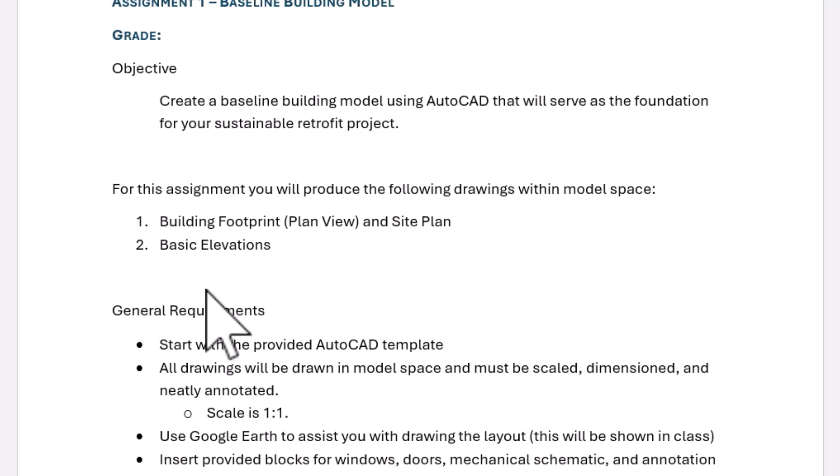General requirements: start with the provided AutoCAD template. All drawings will be drawn in model space and must be scaled, dimensioned, and neatly annotated. Scale is 1:1, so in model space just make sure you keep it 1:1.

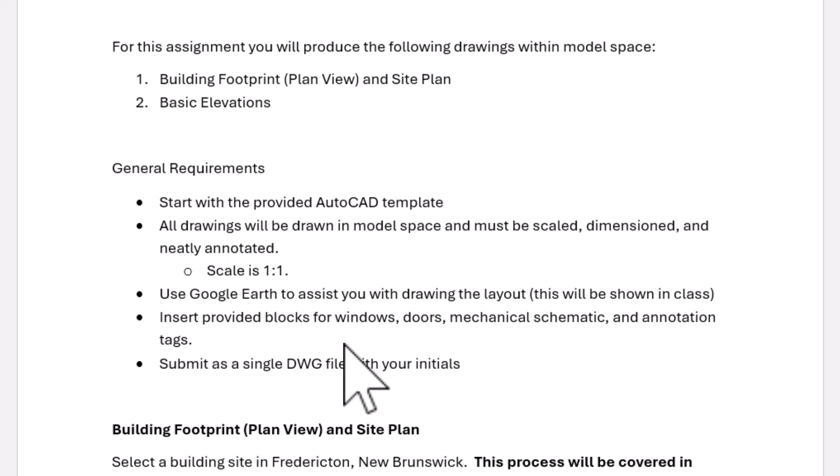For the building footprint plan view, select a building in Fredericton, New Brunswick. Again, this process will be covered in class.

Look for one-floor smaller buildings that are less than 8,000 square feet. Most students found success with kind of a 3,000 to 4,000 square foot building. It doesn't matter the size, doesn't matter really the location, but we are looking at somewhere in Fredericton.

Draw the footprint, so you're going to create the footprint of the building using color blue. That just means tracing around the outside of the building, once I show you how to load that up into Google Earth.

And then you're going to set the wall size as 2 feet. We don't really know what the wall size of each building is going to be, so just offsetting by 2 feet gives you a pretty good indication of what a normal commercial building is, and that's what we use when we do the footprint. Dimensions.

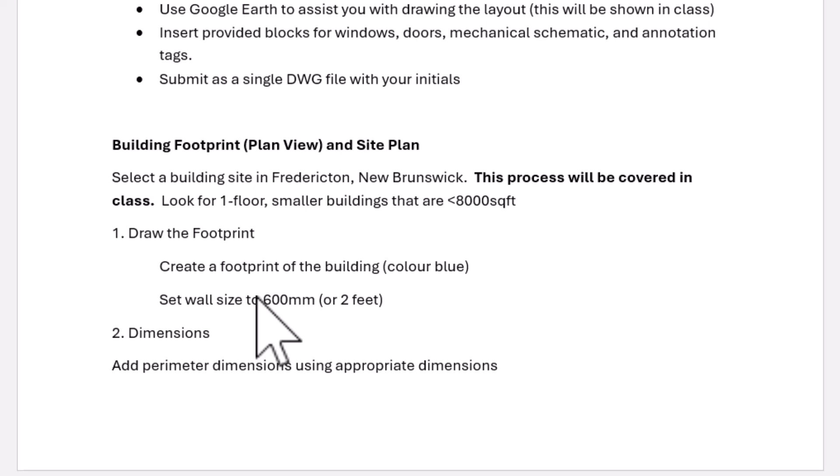Add perimeter dimensions using appropriate dimensions. This basically means that you're just going to use the length and the width for the dimensions of the building. Appropriate meaning keep it in feet and inches, or you can do metric and millimeters. Those would be the two that I would like to see.

Clearly label overall length and width of the building, so again that's for the perimeter. Provide the total area of the plot, so when you finish your actual plot of the building, meaning the whole footprint including the building itself, you'll have the square footage of that building.

Label roadways and streets around the building. This is important to help me understand where this is located. So any major streets - for example, if you're on Prospect Street or Main Street on the north side, you can just label that. But any side streets, it's helpful for me to know where this building is located.

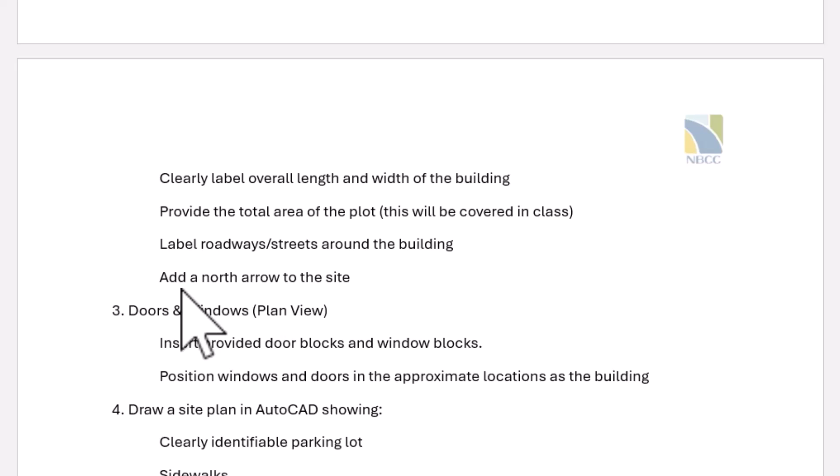And then add a north arrow to the site, so somewhere in the model space just make sure that there's a north arrow indicating which direction is which.

Doors and windows on the plan view: insert provided door blocks and window blocks. Position windows and doors in the approximate locations as the building. Laying these out is trickier than it may appear, but I'll show you some tricks on how you can put these in.

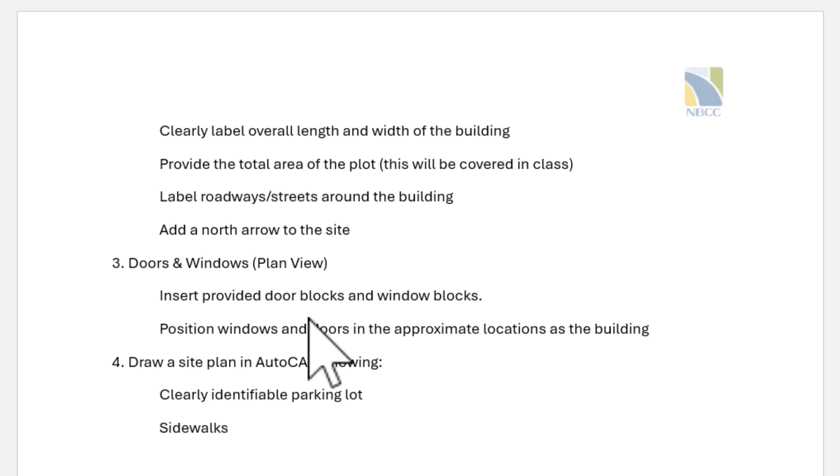Draw a site plan in AutoCAD showing clearly identifiable parking lot and sidewalks. So just making sure that when you have your building, you're also showing basically infrastructure around that site as well.

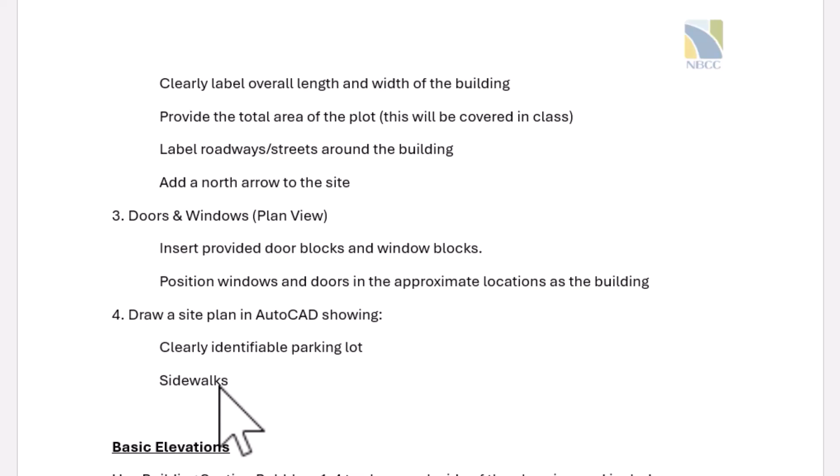For the elevations, use building section bubbles 1 to 4 to show each side of the plan view and include height and width of each side of the building.

All right, so make sure you do the dimensions - window locations and sizes, so wherever you have a window, just make sure that the sizes are shown. Door locations as well - typically doors for commercial are going to be 36 inches or 3 feet.

So I think it's about 900 millimeters if you're doing metric. That's kind of a standard size for commercial. Making sure that the roof line is shown.

If you cannot actually physically see what the roof line is, make sure you just ask. But most buildings, if there's a flat roof, probably have a parapet of some kind, but usually you can see that now with Google Earth. You can zoom right in.

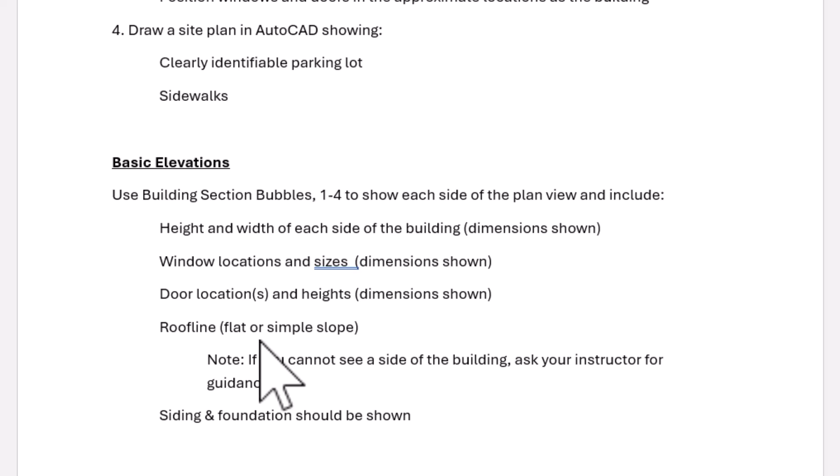Making sure that you draw the siding. So if it has brick, or vinyl, or steel cladding, just making sure that siding is shown.

The next video I'll show will be opening up and showing you how to get started.

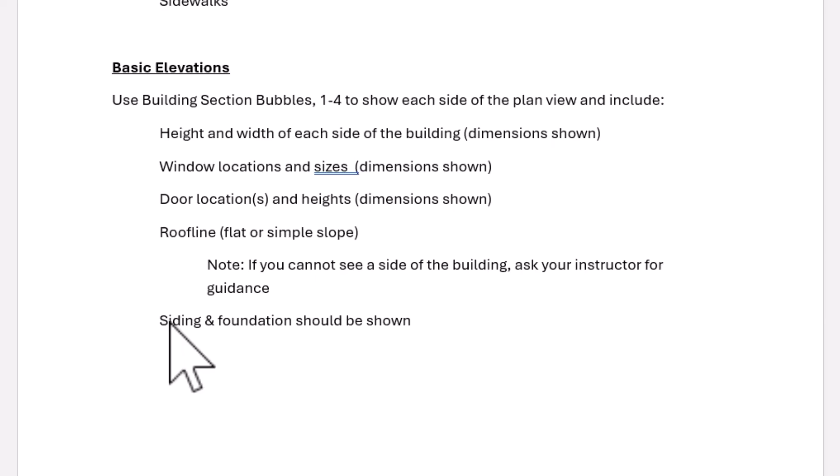Okay, so let's take a look at assignment 1 and how to put it together. On Brightspace, my suggestion is on the left-hand side you go into templates and download SBC-1-template, the CAD file. You can download that. I'm just going to point out a couple things that I pointed out in the instructions.

Underneath here, there's some blocks you can download. Those have windows and doors that you can get.

This is another file that myself, Dominique, and Scott have put together over the years. It's a great file. It basically shows a lot of the stuff you guys want to do for starting up a drawing—things like layers, line types, text heights, that sort of stuff. So by starting with SBC-1, you have a lot of the stuff, but it may not be complete. Reviewing this file, going through and making sure you have everything set up that you want. You probably have this done in Senior Project, but if you don't, this is a good place to start.

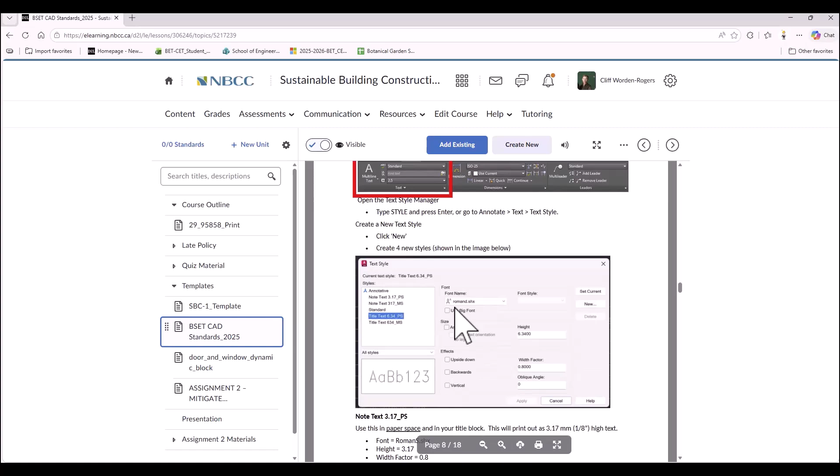When you download the file, it's going to start something like this, and it's going to say open up the external reference palette or ignore the unresolved reference files. This is looking for something for the title block, likely an image of NBCC. If you need help making the final title block have an image in it, I can help. For right now, though, we're just going to hit ignore.

So ignore that. What we're going to start with today is getting a map open here where we can go into Fredericton and select a building site. Let's start by doing that.

Underneath the insert option, there's a little world icon over here called set location. If this is turned off, you can come up here and type in the keyword location, or Google how to turn that on. We're going to go from map—so we're going to select this.

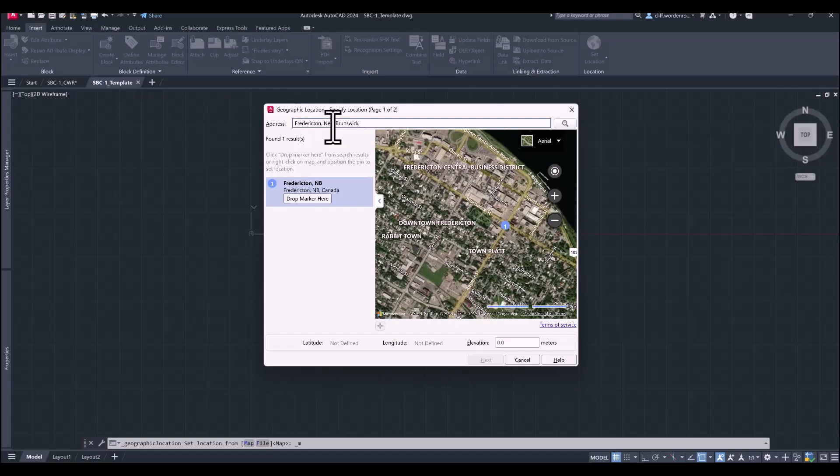Now we have the ability to basically look through the world where we want to go. So we're going to type in Fredericton, New Brunswick. Hit OK, and now we have our city pulled up. I'm going to drop the marker here, so it's going to show where I am. I'm going to hit next.

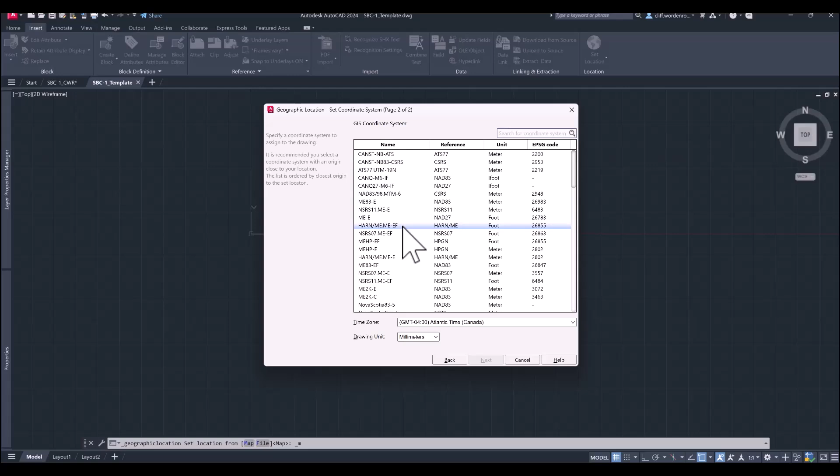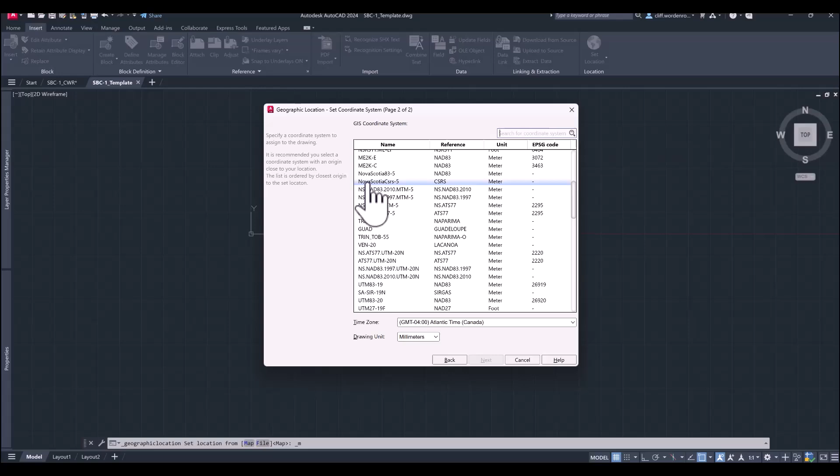Now this next piece should talk about how the GIS coordinate system works. I don't have a great answer for this other than—there's so many here. This probably matters when you're doing surveying. For what we're doing, we don't really need to get that specific. I usually have used the Nova Scotia ones—these are NS ones. Any of these will work. For the sake of purposes here, I am going to use this one. I'm going to hit next.

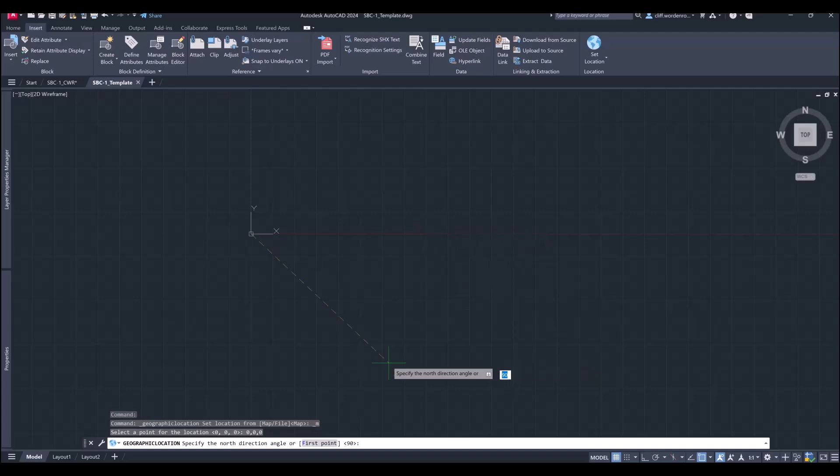It says select the point of location where you want to start. I'm just going to go 0, 0, 0. Hit enter. It says specify the north direction angle—you do want it at 90. You'll see here it's trying to select this, I just hit enter. So 90 would be straight up, and we should see the map populate.

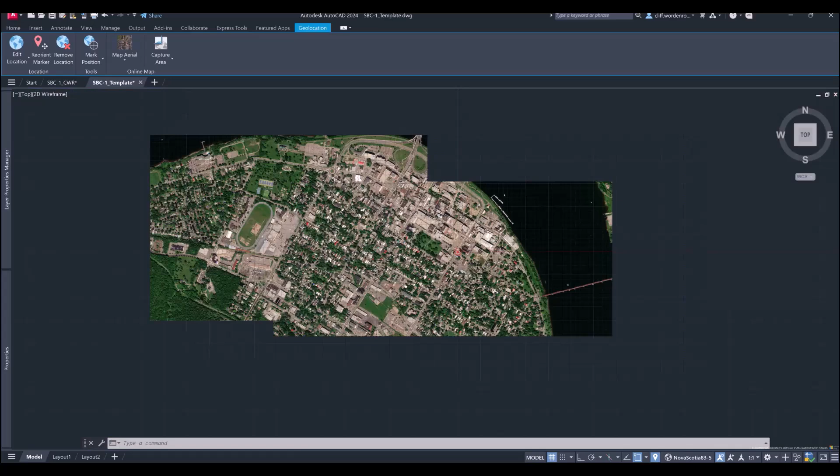Now we have Fredericton—now we have our location picked out. And now you can really figure out what site you want.

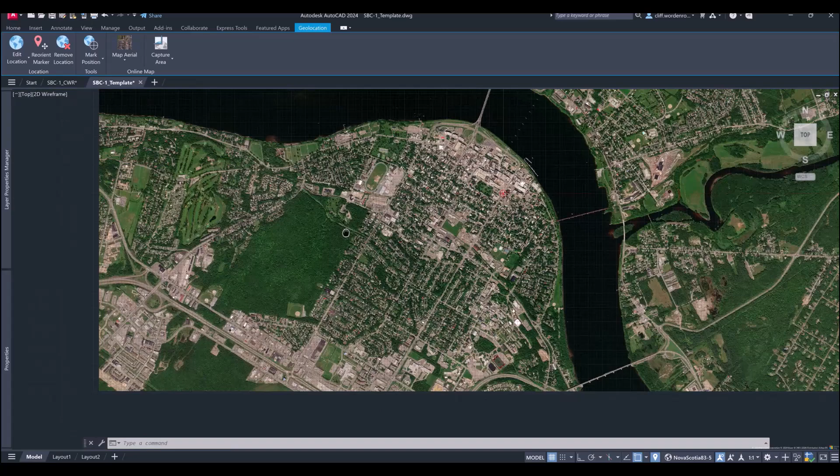You can do it here in AutoCAD, but my suggestion is to go to Google Maps and figure out where you want to go. The site that I chose for this building is up on Prospect Street as the example, which is the Second Cup. So Second Cup is this site here. I'm going to open that and show you kind of what the finished drawing is.

I'm going to show you how to do that here in a second. But I just want to talk about—there is no right building here. I just want you to select any building.

It can be along Prospect Street, on the north side.

What I hope is that by going through this course, you learn by drawing and going through these different buildings, or your own building, that there's things you can change about it and things that are good about it. So there isn't a right or wrong answer.

The reason I chose Second Cup was that I just felt, as a small business being near Tim Hortons and Milltown and a bunch of other coffee shops, I kind of felt for Second Cup. It's kind of a small little business, and I was wondering what they could do in terms of making their business better.

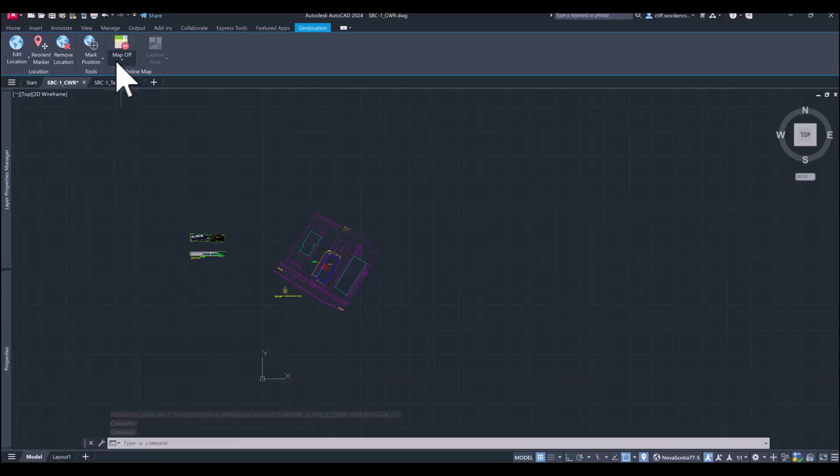All right, so I'm just going to flick over to my building now. So mine is this one, right? This kind of shows what the finished product looks like. I'm going to turn the map on for a second and show what it looks like over top. So I've drawn over top of this, and I just want to show you again how you approach drawing your site, and then I'll go through the text and all that stuff.

So if we go back to the assignment instructions, some of the things I want you to do is draw the footprint of the building, which is the outline. You'll see this blue line, and there's kind of an offset here around the outside that's 600 millimeters from that. So I traced the outside of the building, then offset this one to go around the outside.

I think this other line here is the roof plan. So the roof actually extends over top of the walls itself, so that's what I'm showing there.

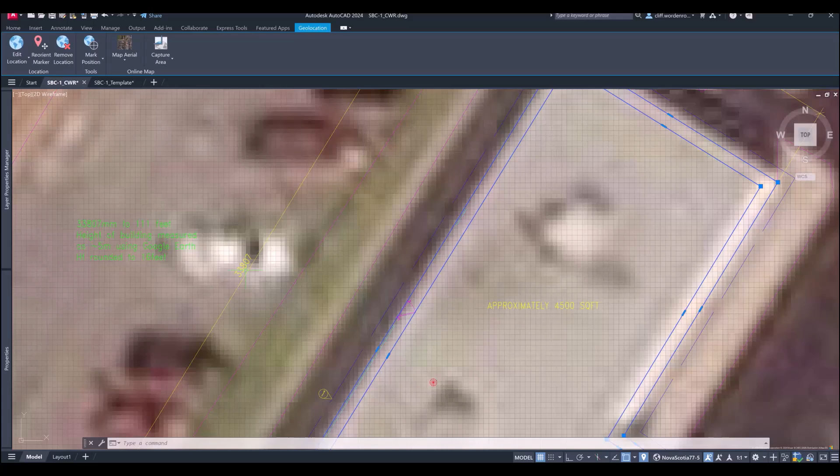All right, the next thing I'm showing is the dimensions. So the drawing that I have is metric, so these dimensions are in millimeters, but you can also do yours in feet. I actually kind of do both. So I've got metric - actually, let me just check this.

So these are international units, yeah, these are millimeters. So I do have millimeter dimensions, but I also do the physical dimensions in feet. You can do square millimeters, square meters, square feet - I just find it's easier for me to think in feet, so that's why I have it. All right, so I have the dimensions, and that's the exterior of the building, so I have those two.

Here again, I've just said the roof awning surrounds the building, that's why I have this little external dimension. You also need the total area of your building.

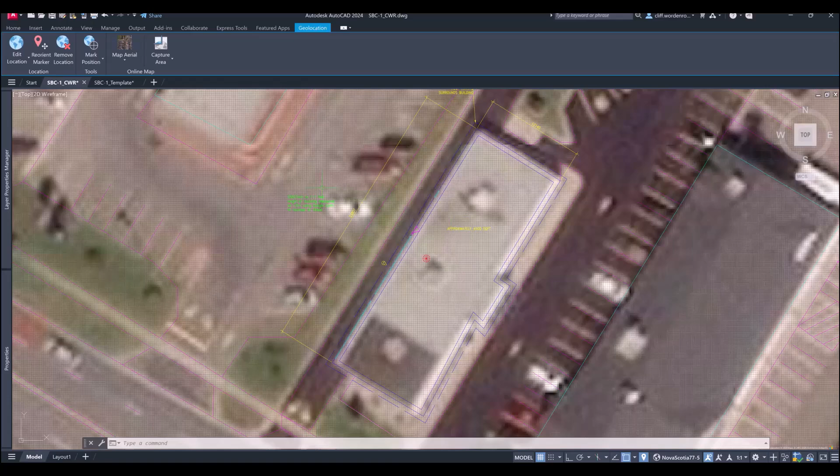Getting the total area of the building, I'm just going to scroll up here and show you how to do that. If you come over here under the Home tab, underneath the Measure, you can grab your area and area. So you're just going to snap this and get your general interior space.

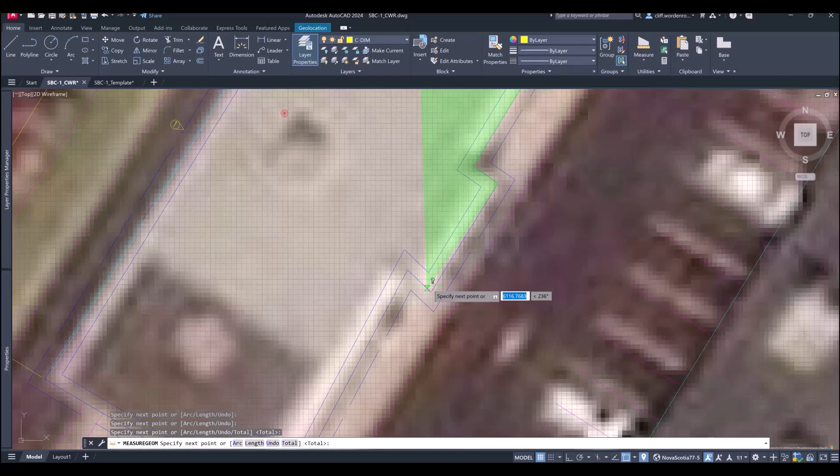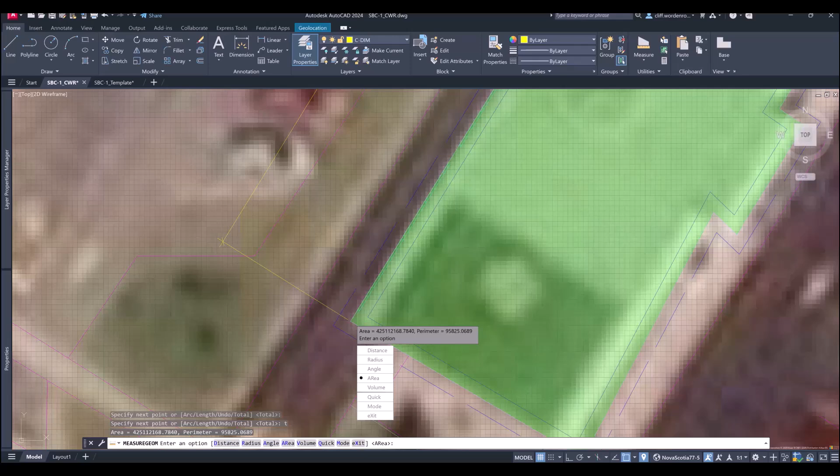So it's not the roof line I want, it's the interior of the building itself that I want, right? And then once you get this all done, I'm going to hit total. You'll see down here it says area, right? So mine is a massive number because it's in millimeters.

What I do is I take that dimension and then switch it to square feet. Again, you can just Google millimeters squared to feet squared, and then I write on top the approximate square footage of the building.

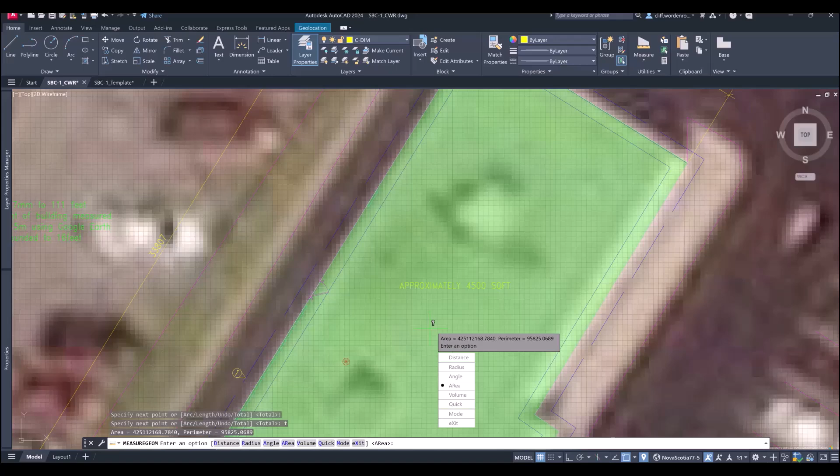Label roadways, streets around the building. So once you have this all traced out, you trace around the outside of the building, again, your parking lot.

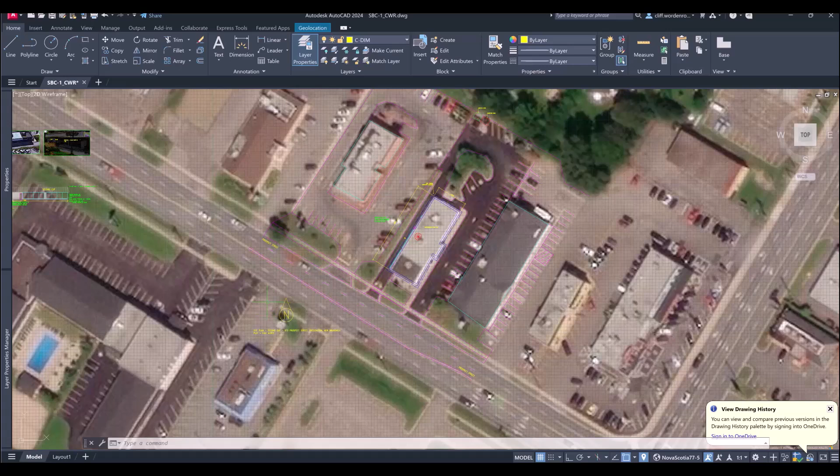Okay, I'm zoomed out here. You can see I've labeled the streets, Prospect Street. If it's a really long street, I label it on both sides. If there's an intersection, I label the intersection so I know where it is. The last thing on the instructions is adding a north arrow, which I've labeled down here on the south end.

So if I go into geolocation, I'm going to turn the map off. All right, so it's there. You can kind of see what I'm looking for in terms of the site.

One of the big things I'm looking for, guys, when you're drawing your building, is anything that's going to impact your site. Impact means factors like wind and sun. If the sun is coming around the building, it's going to be on the south side like this. Is there anything around your building that would potentially be impacted by the sunlight or the wind?

What we'll learn is the wind generally comes from this direction, coming out of the west going east. This building over here has some impact there, and I'm drawing this too just to show that this might have some impact there. So really get a full site, not just your building and the parking lot beside it.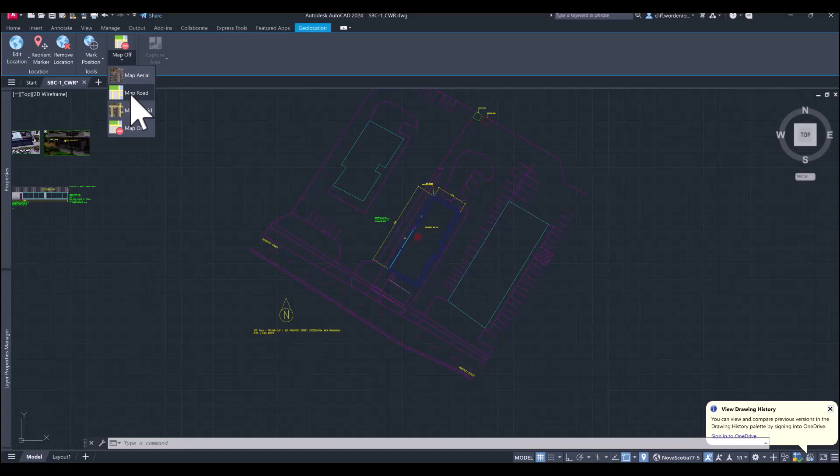With Prospect Street, there's really nothing on the other side that's going to impact my site. These are all low-lying buildings. There's no big trees or anything over here that I have to worry about.

But if I was drawing, say, this house, all the trees here would have some impact on this house. Obviously we're not drawing houses, we're drawing commercial buildings, but I just want to show that as an example.

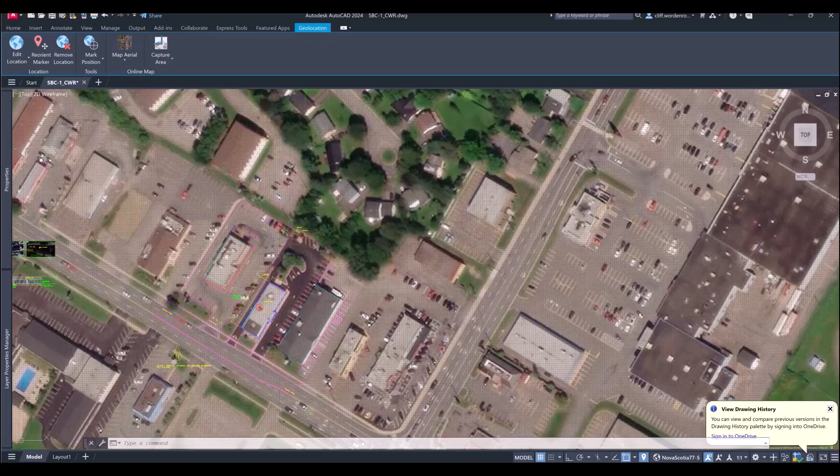Right, after that, gang, let me turn this off. The next is doors and windows. So in plan view, I've done a side view of the building. In my example, I've just done the one elevation, but what I'm asking for you is to do north, south, east, west of that.

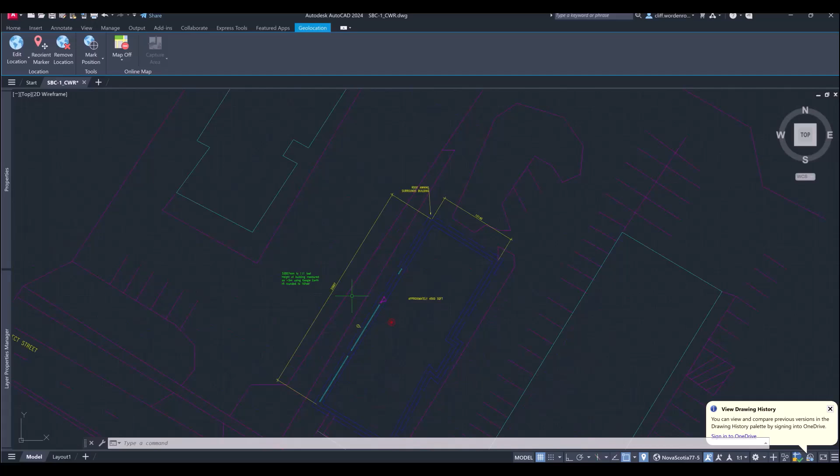Here you'll see I've labeled the west side of the building, and this is viewpoint 1. So if I come back to my building, here's number 1 — this is the west side of the building, and so I'm showing that.

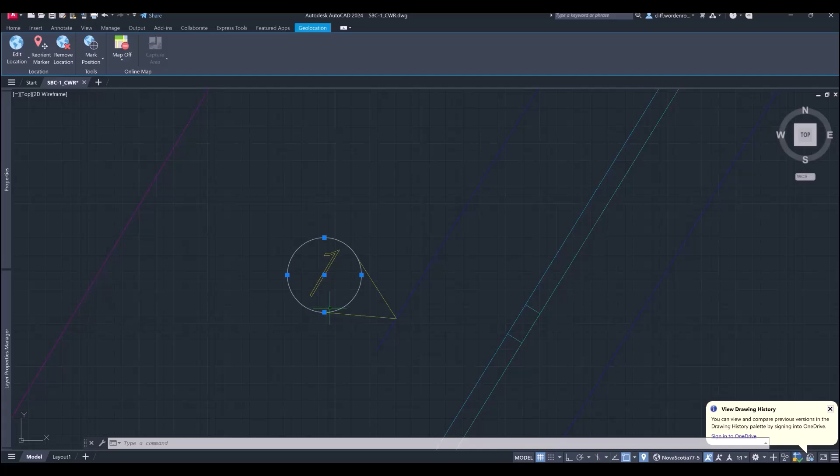In AutoCAD, the way we show that is we draw a bubble, and then just make a little triangle on the outside, which you can trim if you want. I started with a circle, added a text bubble with number 1 inside, and drew a little arrow. You can draw an arrow too, but these section bubbles are quite common, and you just put that on the outside of your building.

On the plan elevation, I've added where the windows exist. Again, these are blocks you can get on Brightspace as a template. So wherever there's windows on your building all the way around, you're going to put them in. I've just shown it as an example on the west side, adding doors and windows where they need to go.

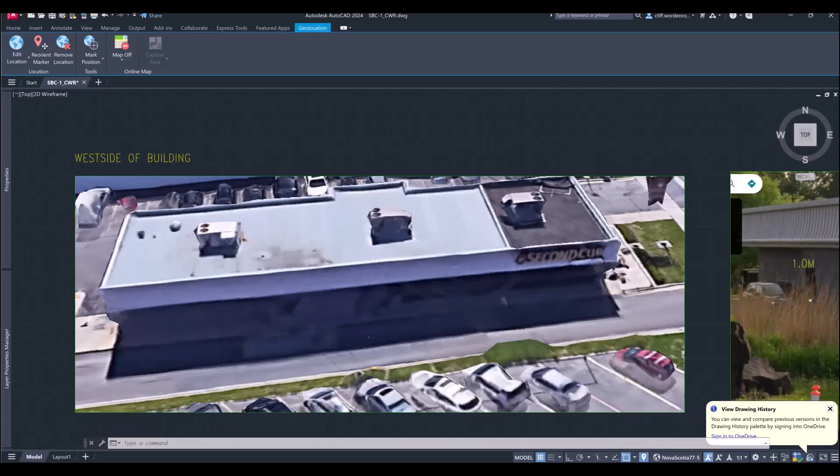The window sizing — the way we're going to do that is you can go into Google Earth and look at the physical site. So I've snipped some images to show how long things are.

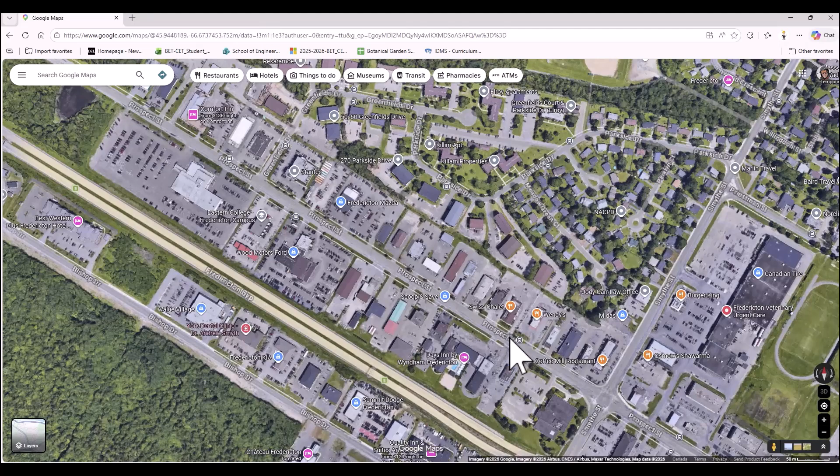So the way we can do that is if you go into maps, and go to your site — so here's Second Cup. I can drop my Google guy down, and here I can visually see how far everything is.

Now in this view, if I right click my mouse, I can't measure anything from this. So I'll show you in a second how to go to Google Earth, where you can actually measure things.

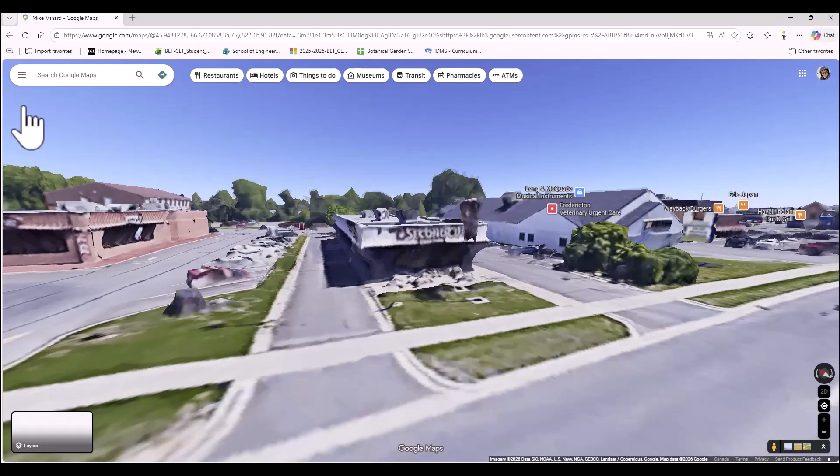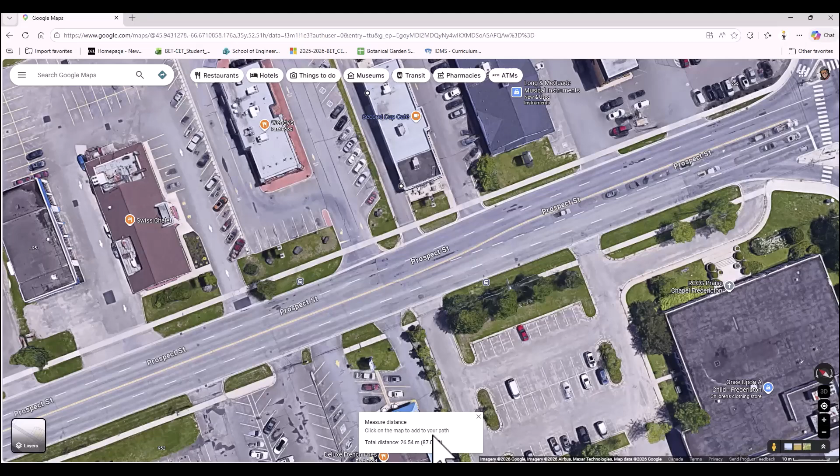But you can measure on the top view if you want. Here I have a little circle, so I can drag that and get dimensions of my site. You see here, total distance 26.54 meters or 87 feet — that's how I can get measures from the top. If you need Google Earth, just Google it and put in Google Earth.

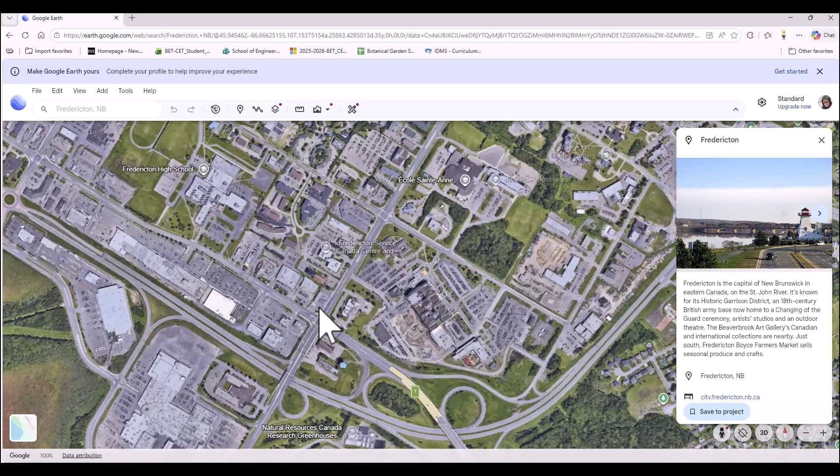Come up here. So these are approximations, gang. They don't have to be exact. So I'm not looking for... they should be roughly, I would say, right. But what I'm getting at is we're using technology to help us estimate. If we were physically on the site, I'd expect you could do this with a tape measure. We just don't have that here.

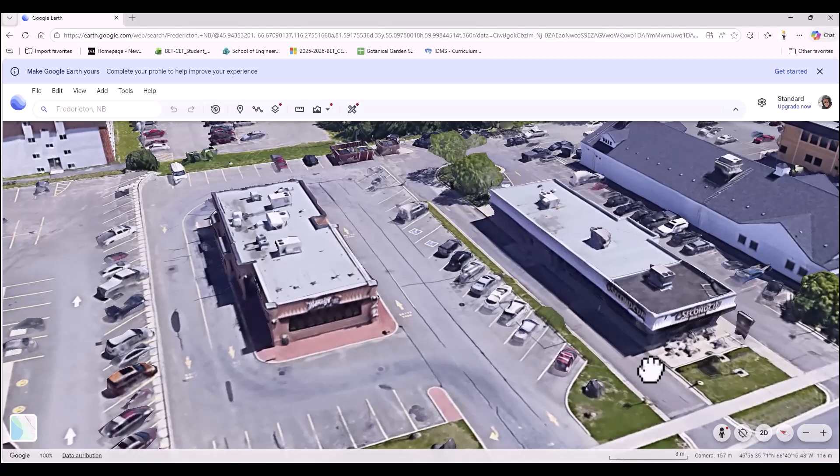So let me get out of here. If we go into 3D mode, this is the building I'm looking for, right? What we can do here is get into measuring points, and it will do, for example, I can take distances here. So I can estimate how far they are using Google Earth, get those dimensions, and translate that to window sizes and how long they are.

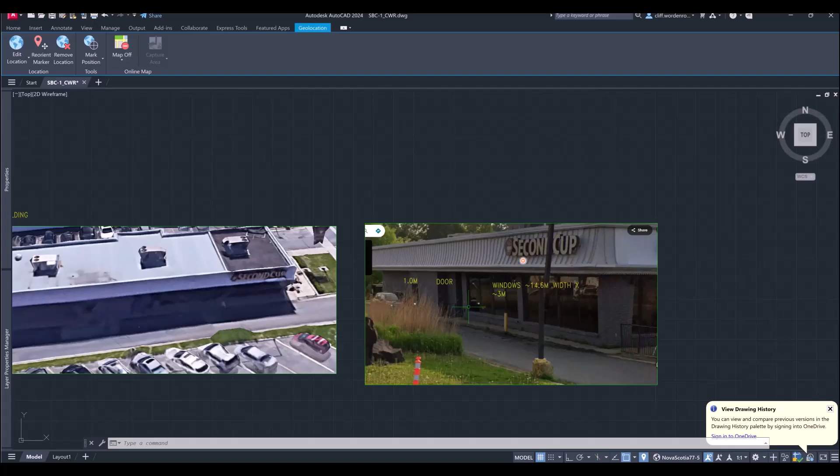So what I did here is I just measured out this window bank. There's a little gap of the building here, which I'll show in AutoCAD. Just use your best estimation. If you have a couple of these, you could put glazing the whole way along. Really what I'm looking for is that you've gone and looked at the building, you've appropriately tried to put in the dimensions that are there as best you can. And here you'll see I put kind of approximate distances.

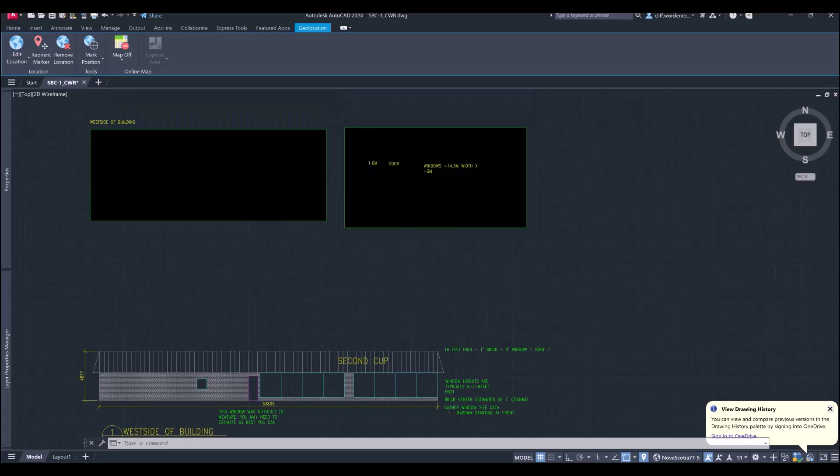So that's what I'm asking for, both on the top view and on the basic elevations, okay? And yeah, you'll put doors all the way around and any windows that are there. My suggestion is go on Google Earth, and if you want, you can snip images here. You can rotate around the building. Sometimes it can be hard to see what's in the back of the building.

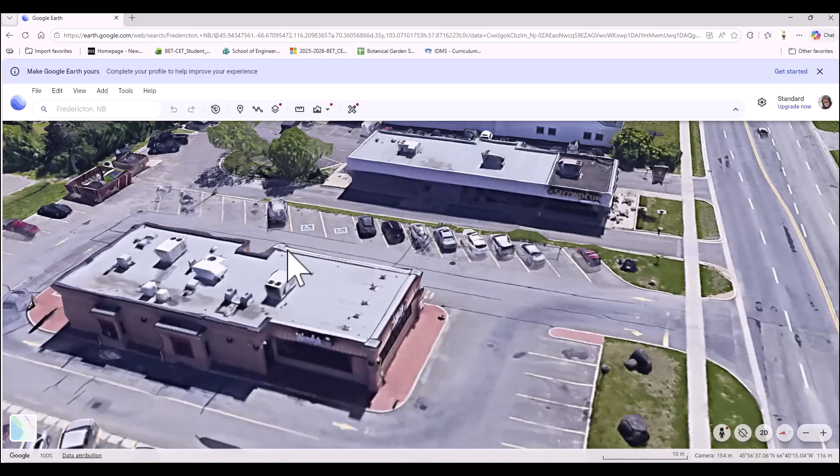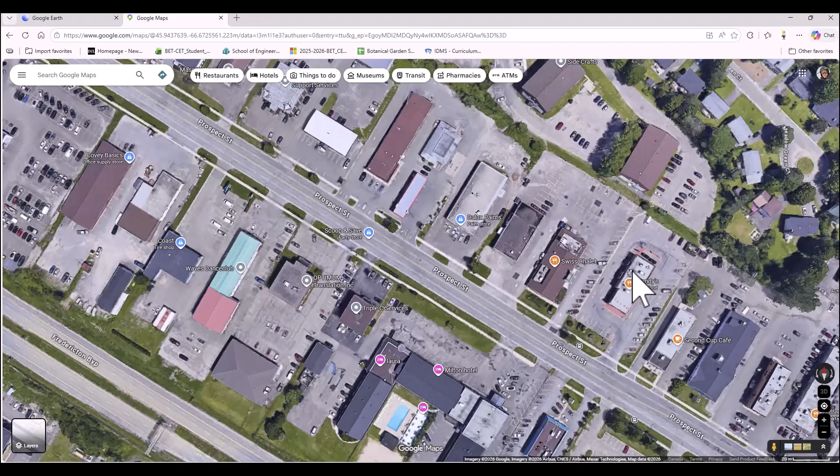So if I come in here, 3D mode, for example, this one I had a hard time trying to figure out. I believe there's a door there, kind of a back entrance, but sometimes you have to take a couple looks at it, see if you can see it. And we're going for, these should look good. They should look like you've tried to do the best you can.

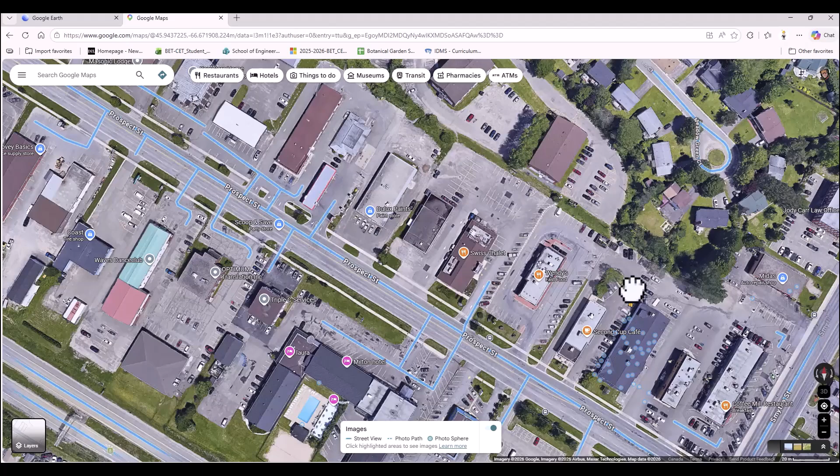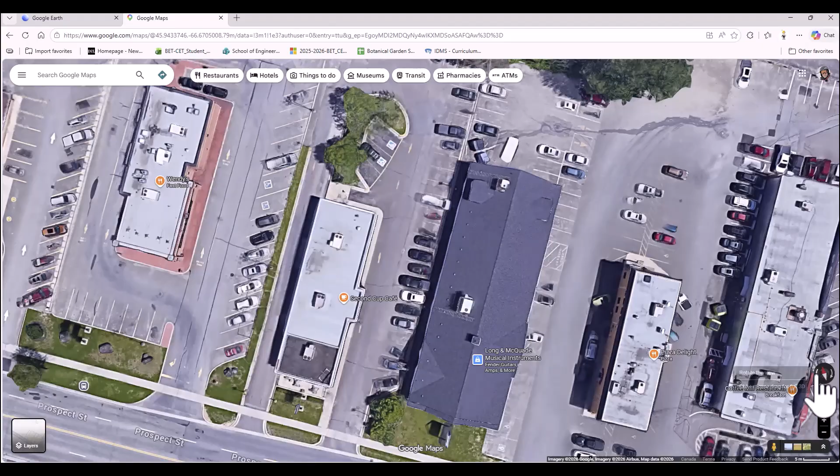Sometimes you can drop the Google guy down to see if you can see anything. Here I can only go as far as in here. Weirdly, I can go as far as here, so I can actually go into Long and McQuade. Sometimes, again, it's hard to figure out what's back there. So sometimes what I do is zoom around here, go into 3D mode, and try to figure out what's there. I do know there is a door back here, the facility waste door, so someone's going to put garbage away.

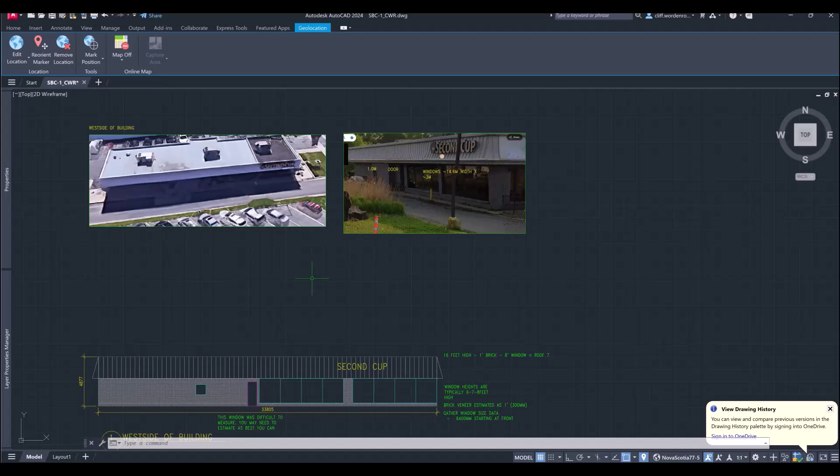I'm coming back to the instructions. It says use bubble sections, use building section bubbles, 1 to 4. So all the way around the building, you're going to have, say, 1, 2, 3, 4. It doesn't matter which side, doesn't matter what number corresponds to the side, but you do need them all the way around, similar to what I have here. Okay, and then where you have that section bubble, you have the side of that building drawn.

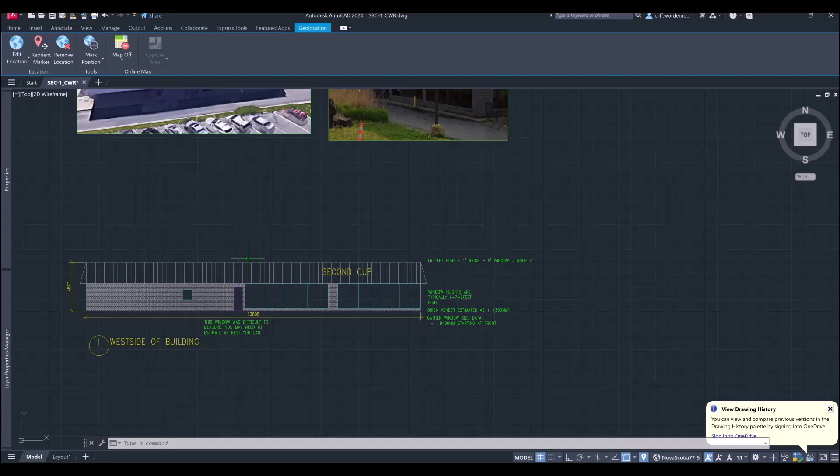So for that, we need height and width of each side, window locations, door locations, roof line - whether it's flat or sloped - and any siding. So what I did is I drew this whole building, just some rectangles, and then afterwards I put in a hatch, a brick hatch in here, and applied it to make it look good, stand out. And then I put the Second Cup sign, because they actually have a Second Cup sign on the side, and I just kind of wrote that over the top.

The height of the building can be a bit challenging. I'll show you how we tackle that. In Google Earth, not Google Maps, but in Google Earth, down here at the bottom, there's a number - here you'll see it's 116. If I'm hovering over here, that's actually the vertical height. So what I can do is take my mouse and try to approximate the lower part of the building, it's at 116. And if I slowly go up, you'll see it's climbing, climbing, climbing. So it's about 120.

So if I go a little bit higher, somewhere between 120, 121. In other words, if we go back to the base again, I sometimes do this a couple times just to make sure. 116 is where it starts, and if I go up, it kind of stops around 120. So it's about 4 meters.

I estimated about 16 feet high as the building height. That's the best information we have. If we had to take measurements, obviously we'd go do it, but that's my general overview of how to get the approximate height of the building.

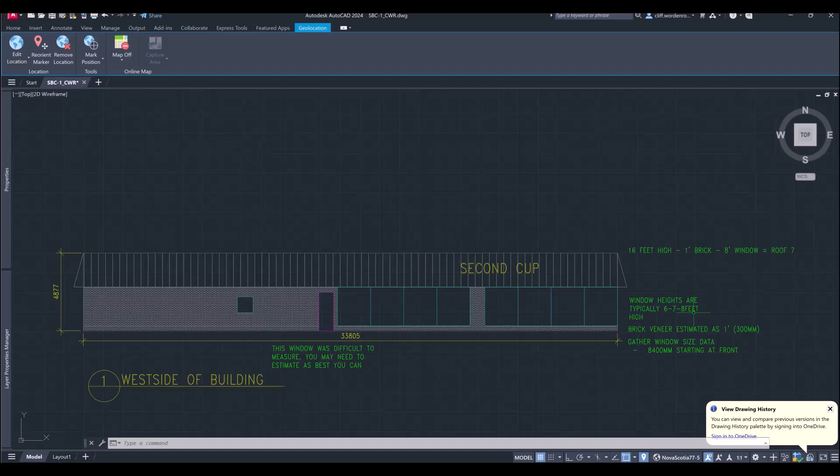Other than that, that's really it that I'm asking - picking your site and going around and doing your best guess at getting the sides. Those are the tools I would use. If you have questions, let me know.

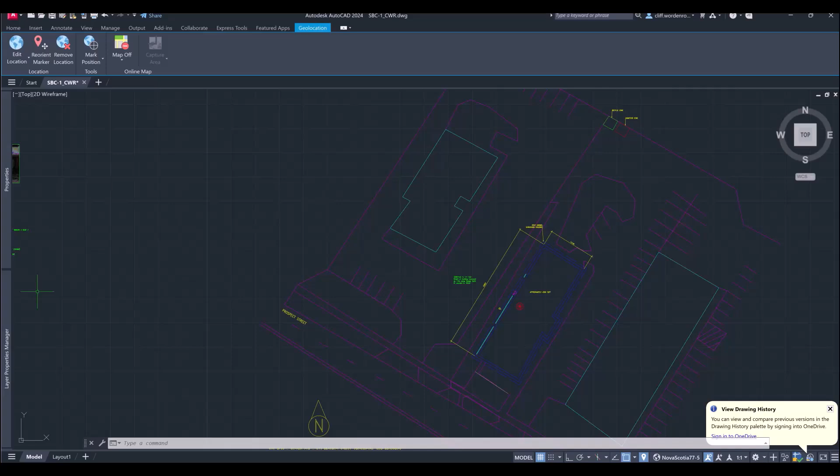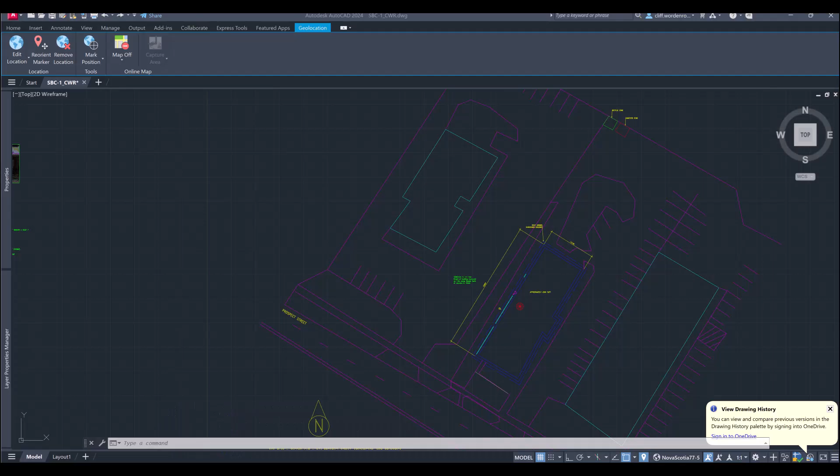Okay, so let's take a look at the rubric for this assignment. It begins with dimensioning and labeling - making sure I understand on the drawing any dimensions. We're looking for the square footage, the width and length of the building site, and on the elevation plans, the height and width of the building. So making sure we have these dimensions labeled, and on the site plan, making sure we have the square footage and the sizings as well.

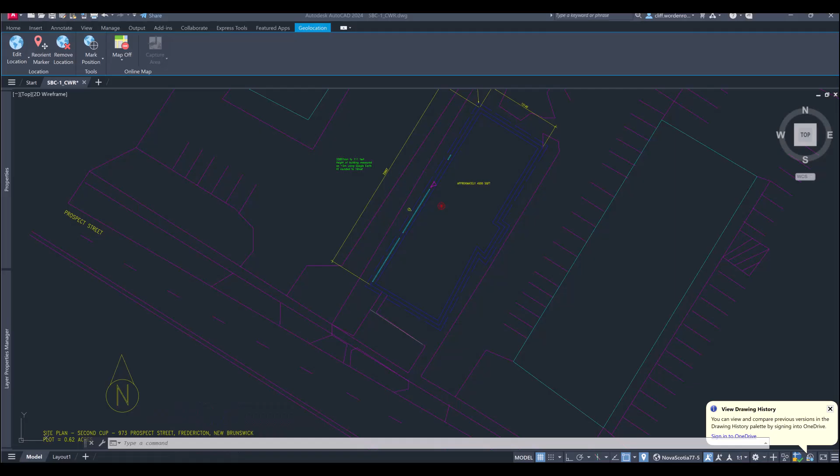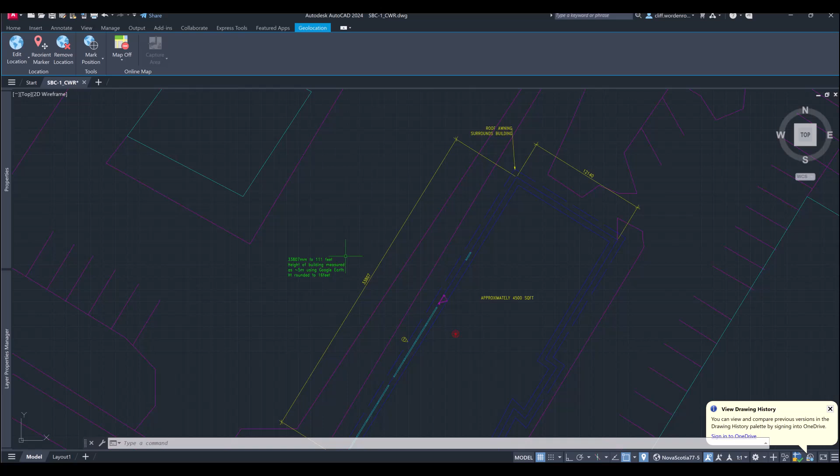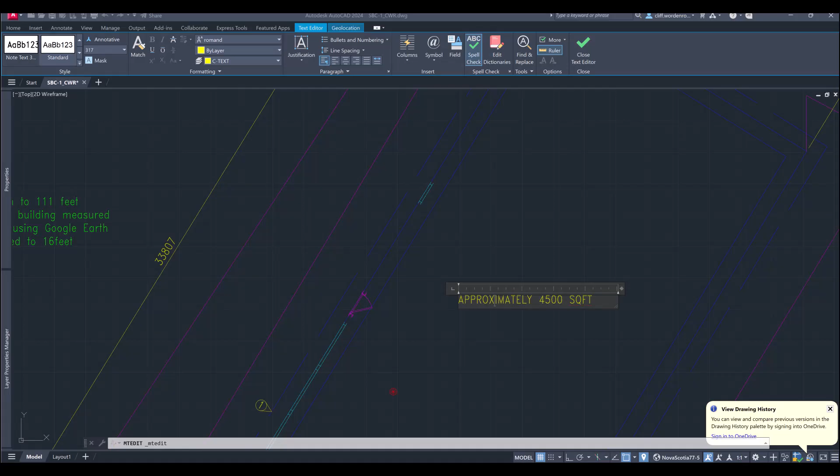As far as layers go, you can keep your layers - I'm fairly flexible with layers. I'll just briefly show you what I have. These are the ones I have - there are some like C Solar, C Dumpster, C Recycle that are ones we don't have anymore, so just be aware of that.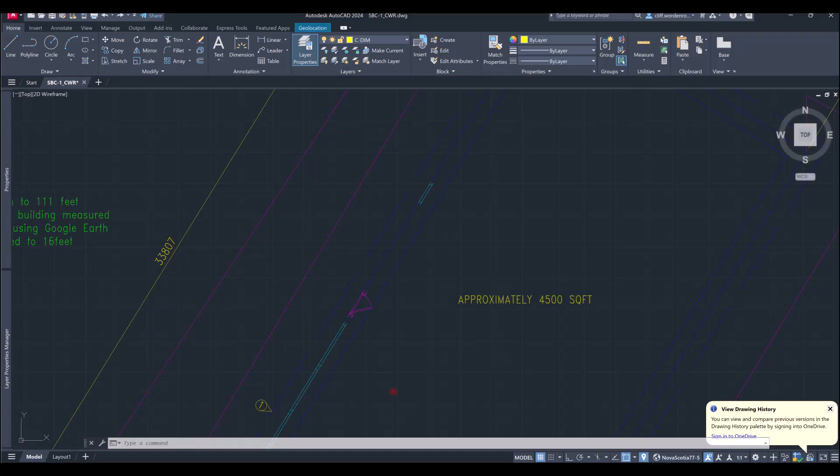Next, clarity and organization - clean, readable, well organized. With this one, when you guys are doing this drawing, the big thing is making sure the section bubbles match where the elevations are, labeling what I'm looking at - west side of the building, if this is north, this is south, east, west - just making sure you've taken that into account. Right now the drawing shouldn't be too busy.

You're going to have your 4 elevations. If you want to put images in and details, that's fine - you can also put them on a non-print layer, so if I turned it off, I wouldn't see it. Just trying to keep the clutter to a minimum.

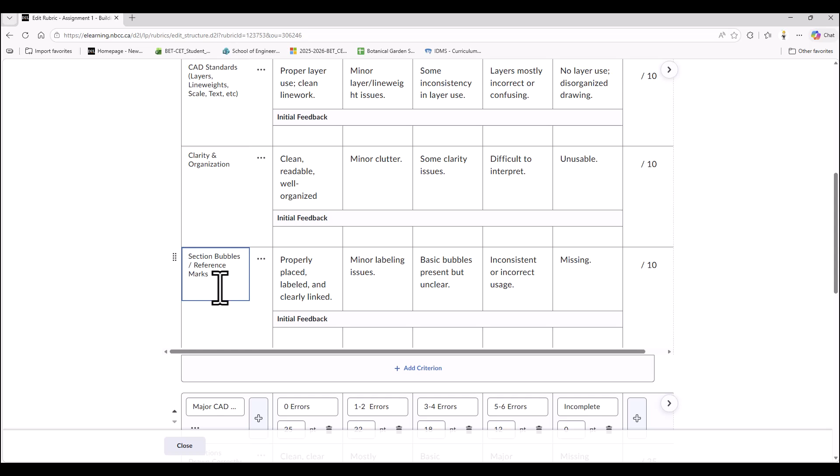Again, section bubbles are really important here - I've given you 10 marks for that. Make sure that they're shown there.

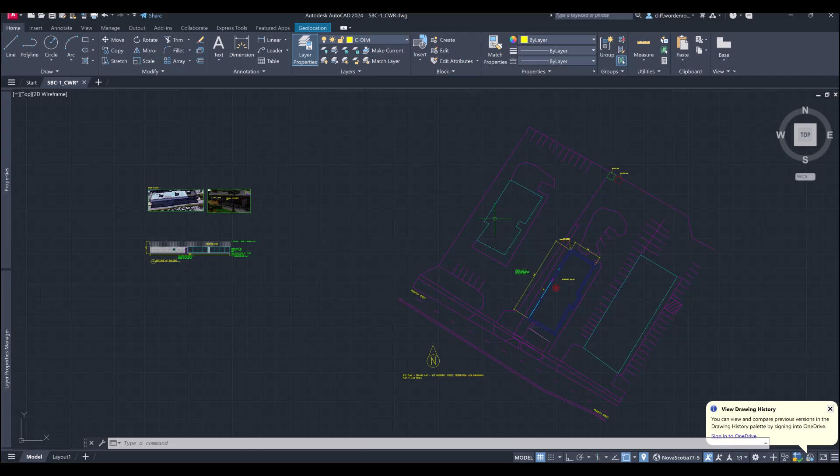The big ones are the elevations and the accuracy of the building - making sure this first go, it should look like a site, it should look like a building. You don't have to worry about layouts right now - you don't need to have anything done, so you can leave that alone, this is just a model space drawing. Just making sure it looks okay, that I can identify what the other buildings are, what your building is, what a parking lot is, those sorts of things.

All right, if you guys have any questions, please ask, but that's the ask for the first assignment. So I hope to see some great stuff from you.